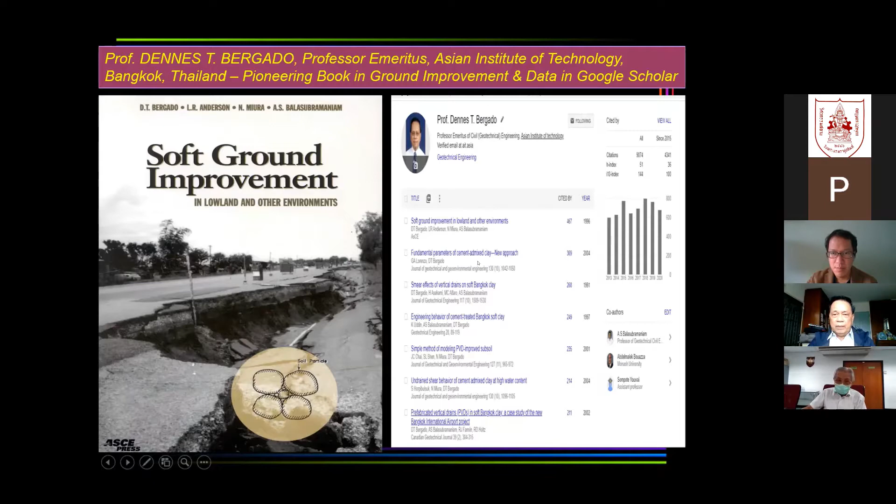So when we improve a soft clay or soft ground, the clay has mostly voids. The solid is only around 40%, but the voids are full of water because it is below the groundwater level. So the only way to reduce the voids is to take out water, and it's called dewatering.

So the previous work before was just preloading by embankment surcharge. And this takes a long time because of the length of the drainage paths for the pore water to go. So the installation of the PVD, or prefabricated vertical drain, reduces the drainage paths to only halfway of the spacing and makes the consolidation faster.

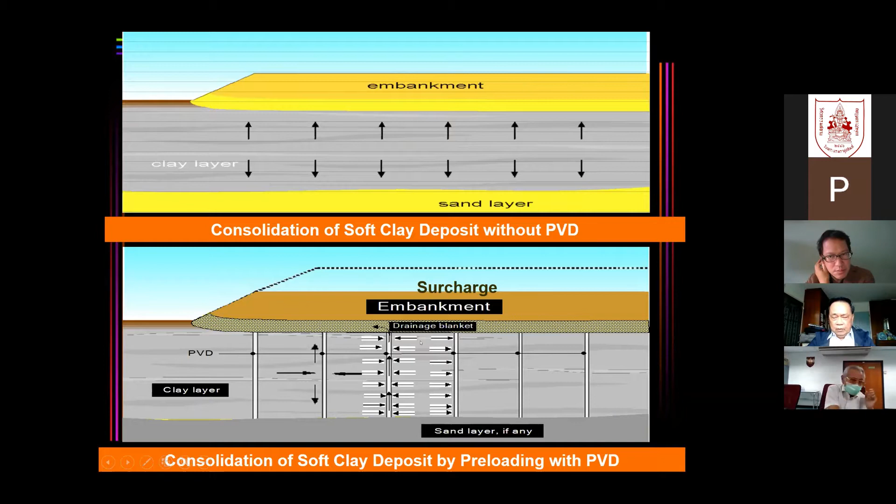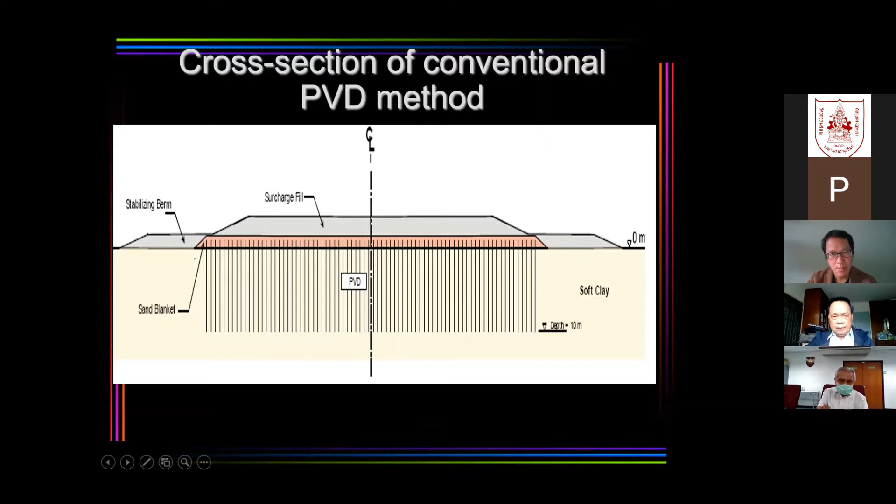So the conventional way was to install the PVDs and put the surcharge fill, but since the ground is soft, you need a berm to prevent sliding or slope failure. But if you provide that without drain, it takes quite a long time to complete consolidation. With vertical drain it is faster, but with vacuum, it is much faster, by about 30% or even 50%.

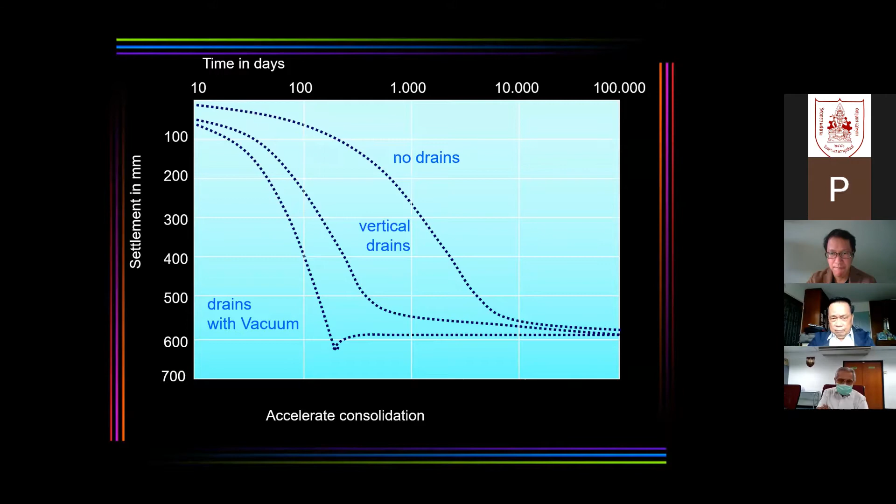So the PVD are artificial drainage paths made of geosynthetics, composed of a core which has channels of flow that conduct water up through the drain vertically, and a filter jacket around the core to minimize the entry of clay particles but allow water to pass through.

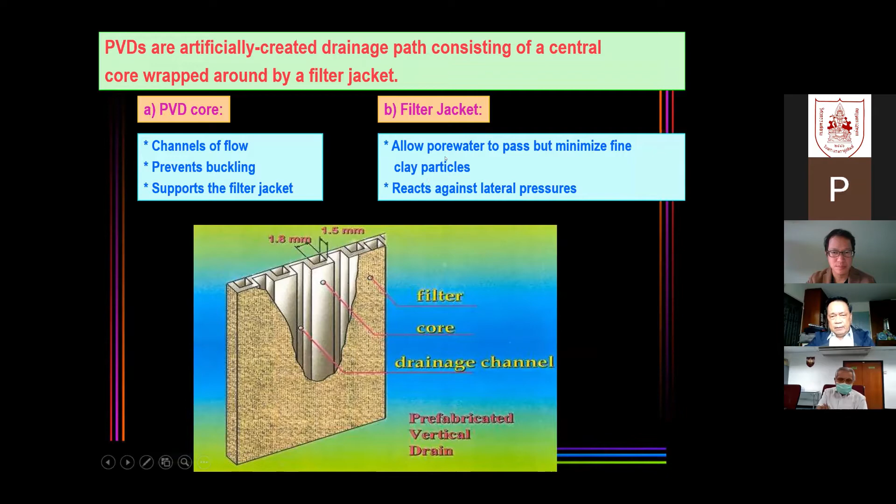So this is installed in a square and triangular pattern by a modified backhoe like this one. But during installation, it causes disturbance around the PVD, and this is called the zone of disturbance, or the smear zone. This is a barrier to flow because kH, the original permeability, is higher than the vertical permeability, but kS, the disturbed permeability in the disturbed zone, is quite low, reduced by the disturbance.

And most of the research was to look at how to mitigate this barrier of flow, the smear zone. By using vacuum pressure, it mitigates this. Although I also have research using electro-osmosis and heat, or thermo PVD, for using vacuum PVD we are mitigating the effect of the smear zone.

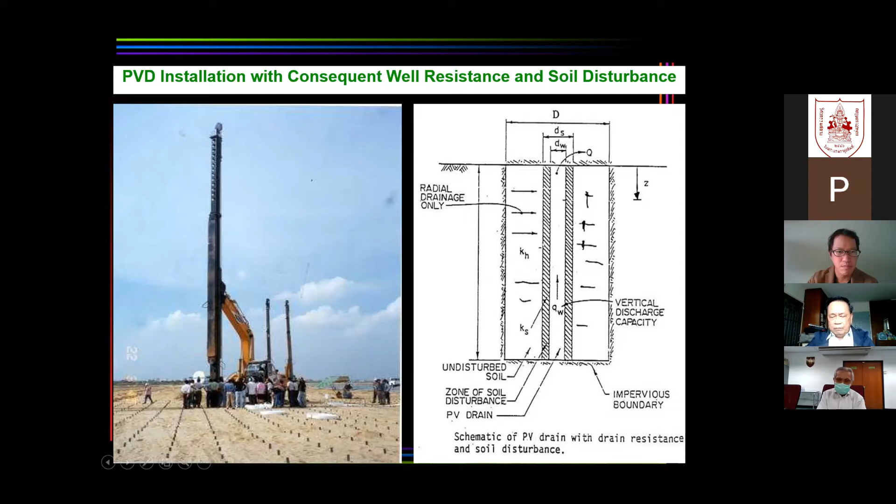So by using vacuum, instead of increasing the total surcharge or total pressure, because the surcharge causes some slope failure, we are looking at reducing the pore pressure by vacuum, and the effect is the same — you increase the effective stresses.

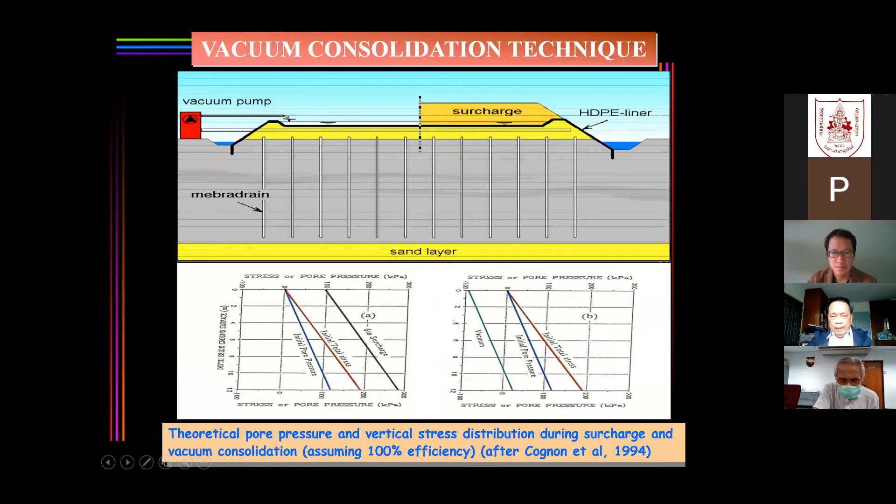So on the left side here is PVD consolidation. We only add the surcharge, and the hydraulic gradient causes the water to flow to the PVD. But with vacuum PVD, we apply additional atmospheric pressure, which is like an isotropic compression — the pressure is the same from all directions, horizontal, vertical, due to the atmospheric pressure up to 100 kPa, but we cannot go to 100 kPa, about 90 kPa we can add.

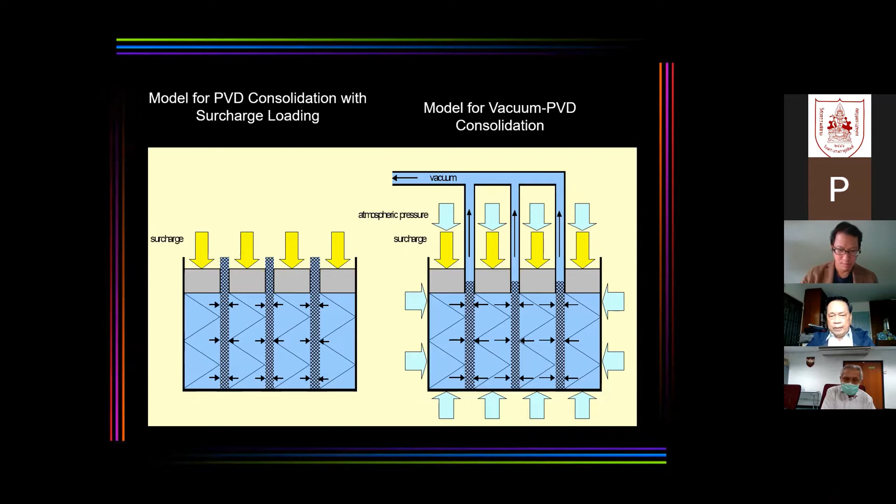So this is the schematic diagram. When we are applying the atmospheric pressure, it has an effect on the pore water.

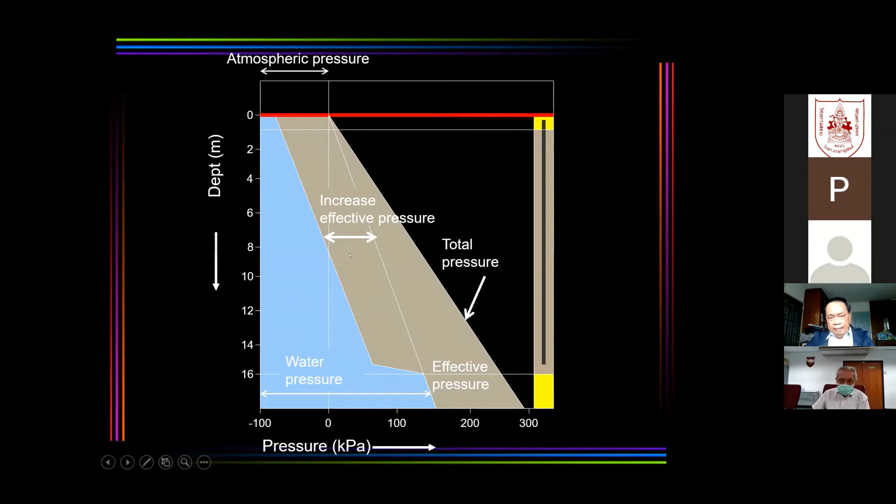So what are the benefits? Well, in cases where you need a lot of preloading, up to 90 kPa, we need to use surcharge and vacuum together, combining surcharge, embankment, and vacuum.

But after vacuum consolidation, there is some settlement, and the embankment will compensate for the settlements. Lateral deformation due to embankment is outward, while using vacuum it is inward. So there is some balance between inward and outward lateral displacement due to the embankment. That's why combining embankment and vacuum is ideal.

This is the list of my publications involving vacuum PVD since 2009.

I looked at it until last year, where we examine the microstructures within the smear zone. All this proves that by using vacuum PVD, the permeability in the smear zone increases, and Kh over Ks reduces, because Ks, the permeability in this smear zone, increases due to vacuum. We also look at the microstructures, the flocculated microstructure change from dispersed to flocculated, which increases the permeability in the smear zone.

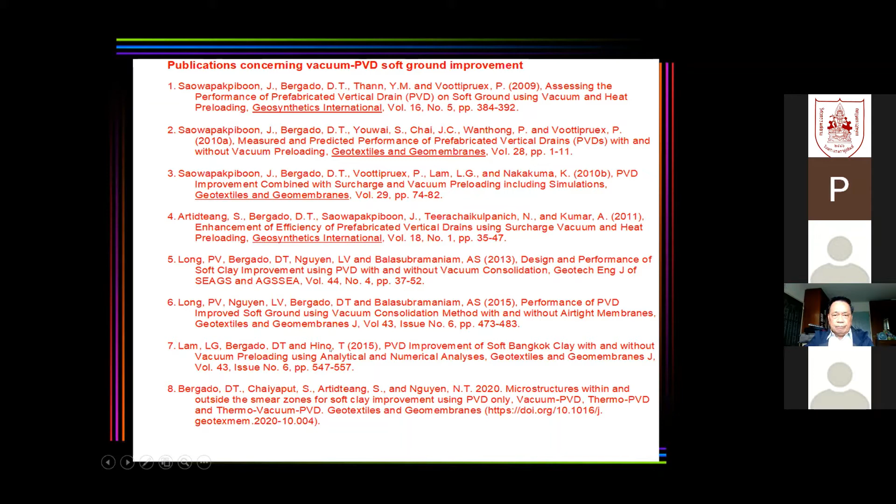So the ground deformation here by vacuum - I use the paper of Professor Chai in 2005, published at ASCE. He did this illustration that we have the soil with vertical and horizontal pressure. Horizontal pressure is K0 times the vertical stress.

When we apply vacuum, vertical and horizontal, depending on whether the vacuum is higher than the overburden pressure, you can have different movement or different lateral displacement.

K also is a ratio between the vacuum pressure and vertical and horizontal pressure, which is the sum of the vacuum pressure and the original K0 times sigma V0, the original from the unloaded soil caused by the overburden pressure.

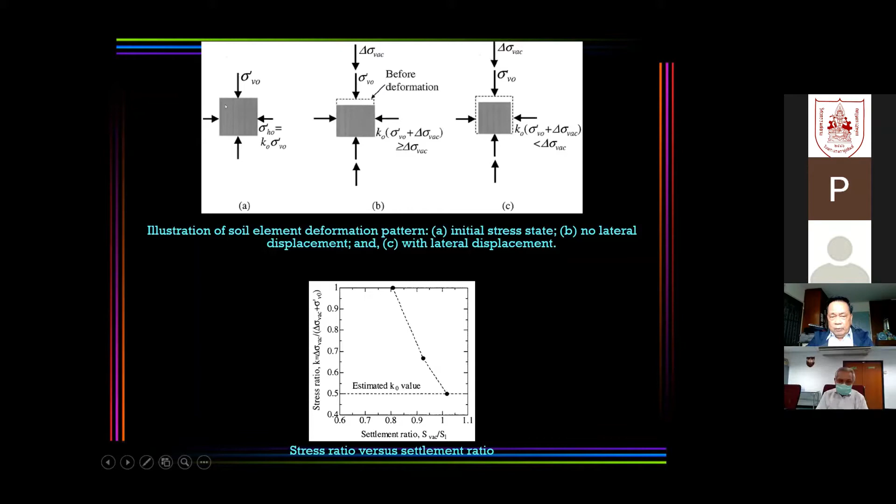So when the vacuum pressure is higher than the overburden pressure, we have inward movement that causes some tension cracks. This deformation can be predicted by the equations provided by Professor Chai, as you can see here. This can be used to check on the lateral movement.

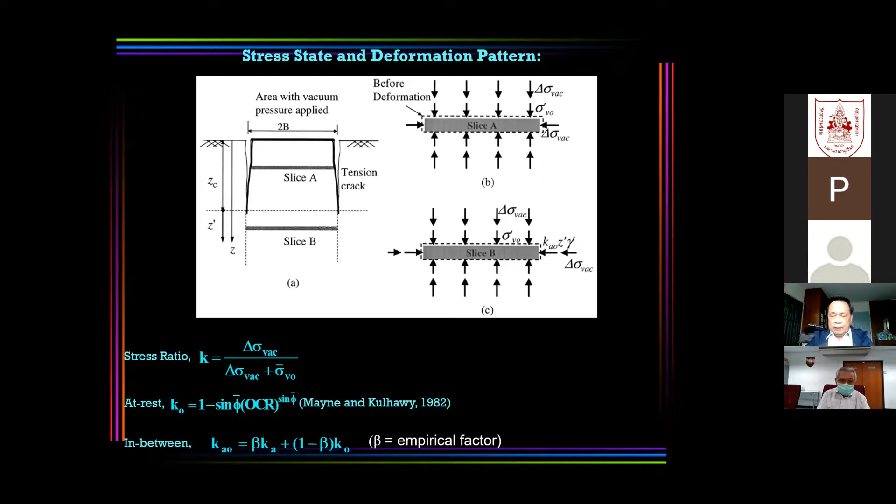And this is the lateral displacement here at the bottom, where B is half width of the area treated by vacuum consolidation.

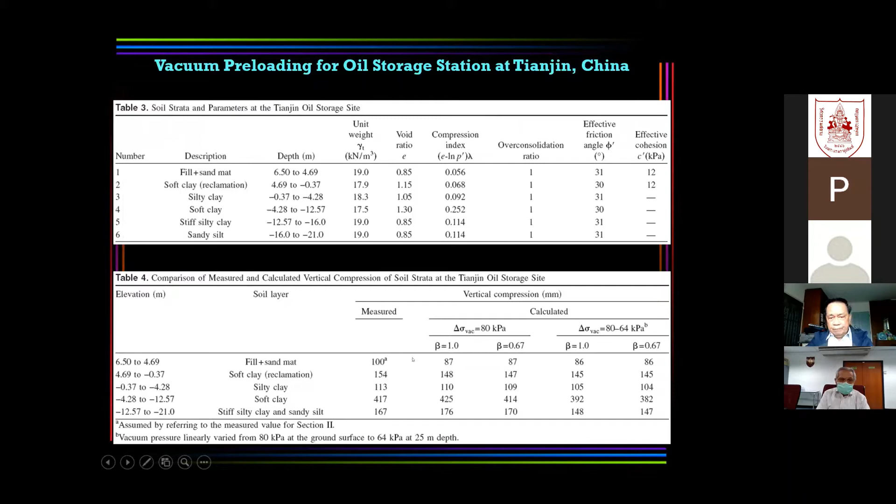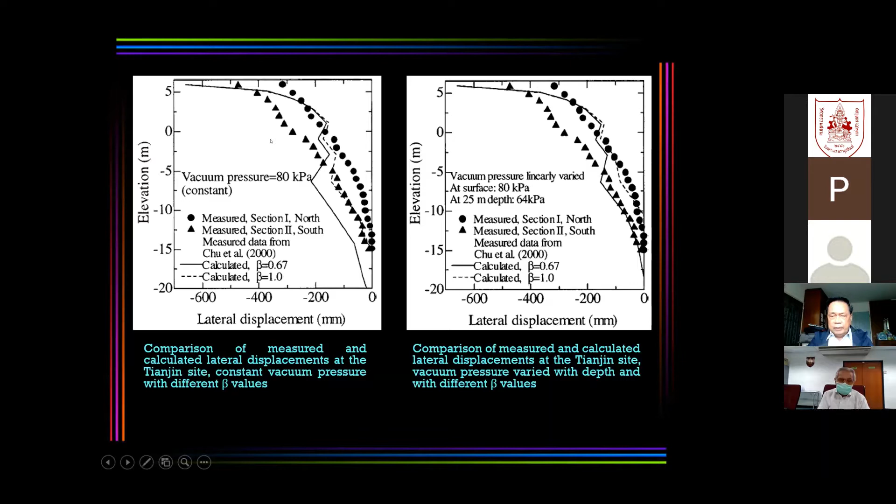Another site in China - here beta is an empirical factor, and here is the soil profile with calculated and measured, observed and calculated values. You can see also that it is predicting the inward movement.

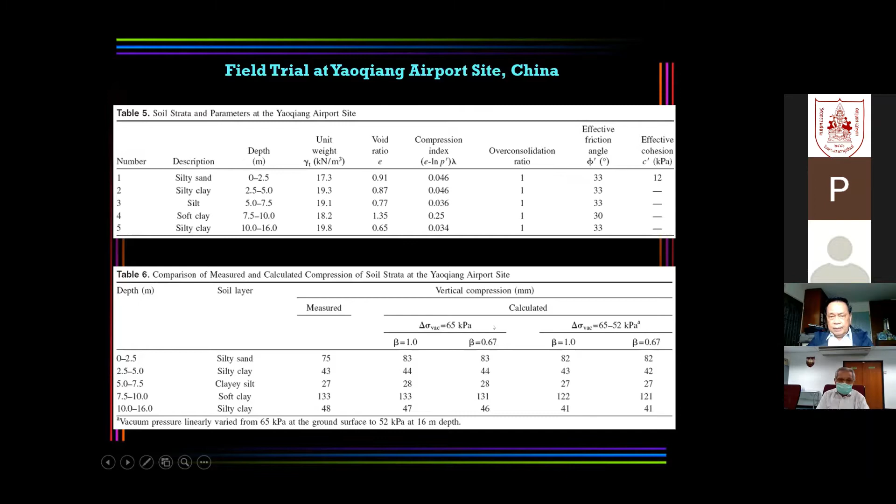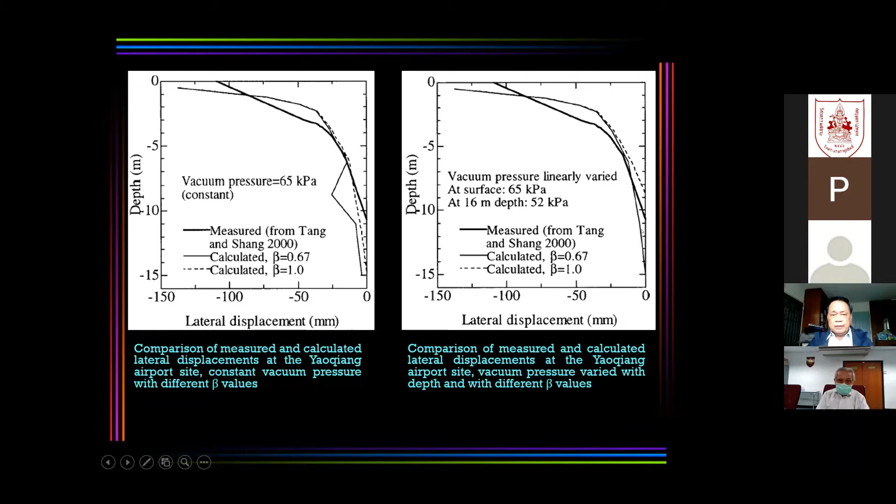So the idea is to combine vacuum with embankment preloading - another paper by Professor Chai, published in the Canadian Geotechnical Journal.

It shows the optimum penetration depth of the PVD when you don't have to go into the sand layer down below, because it will cause some complications. So you can stop it here, and you have some optimum length H1, which depends on the permeability kv1 and kv2.

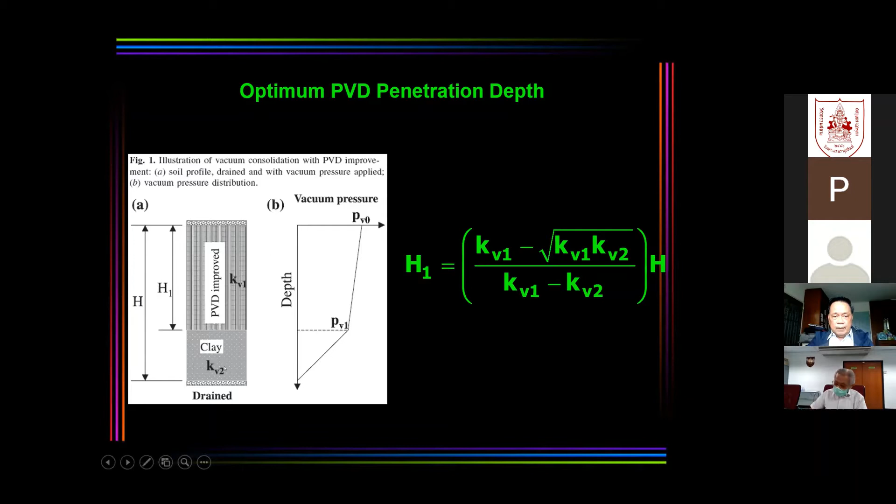He also derived, for two layers, the equivalent vertical permeability when you have PVD. This is one-dimensional flow vertically, with kv1 as the equivalent permeability as a function of the spacing, including the smear and well resistance, with the spacing.

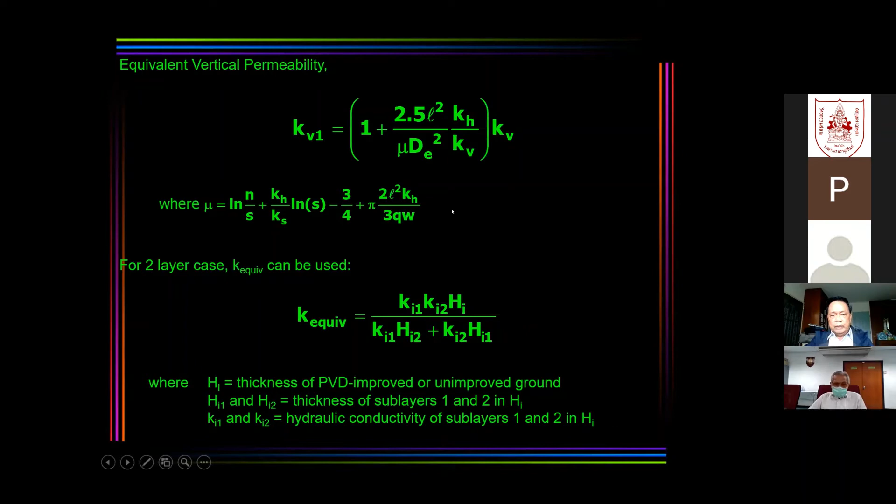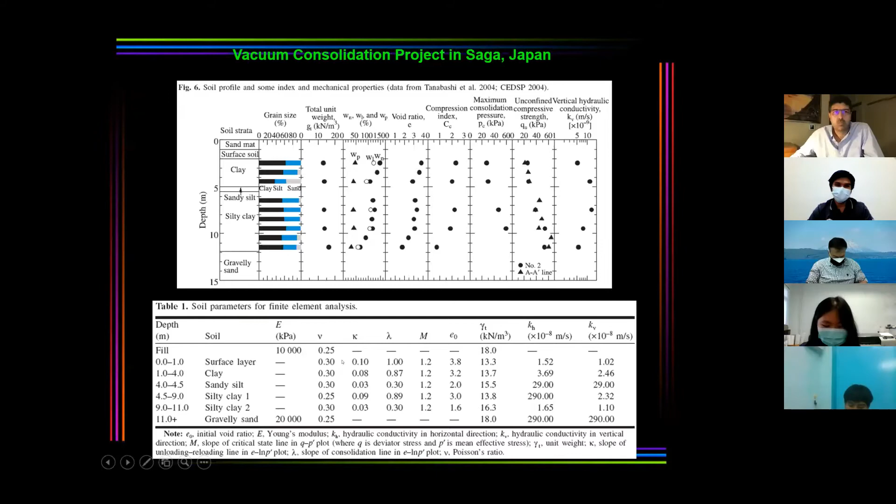So in Saga, there is the soil profile and parameters, used to simulate if the vacuum is intermittent - reduced and then brought back, because you reduce it and then bring it back. Then you have the settlements measured versus simulated, and the lateral movement, which is inward movement.

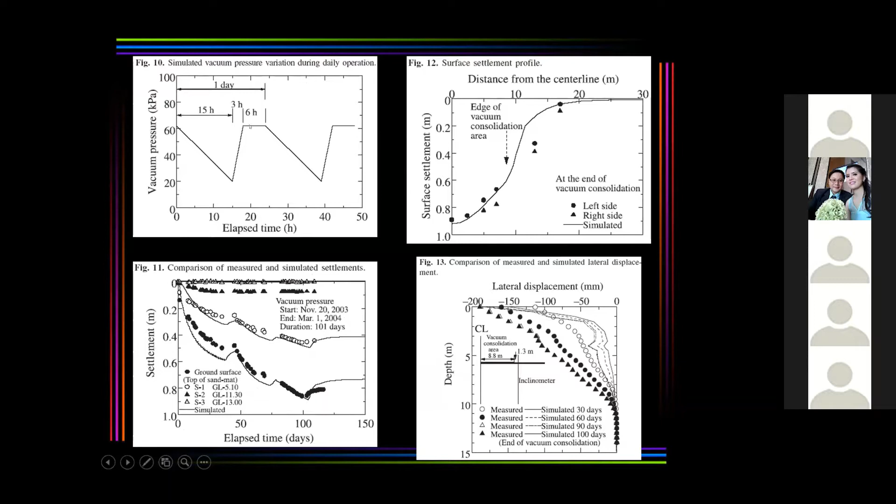Then we proceed to do a numerical experiment. Case 1: when you have the embankment already there, then you add intermittent vacuum. Case 2: you only have the embankment load, surcharge load. Case 3: you have the embankment load but low height, then you add vacuum, then increase the height of the embankment.

You see case 1 produces the maximum settlement because you have embankment plus vacuum. Case 2, embankment only, has settlement mostly the same as case 3, which has low embankment with vacuum and added height of the embankment.

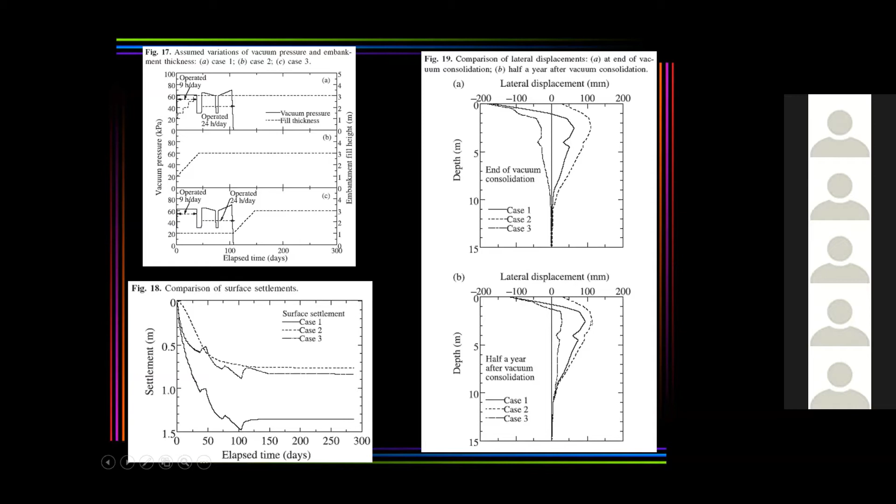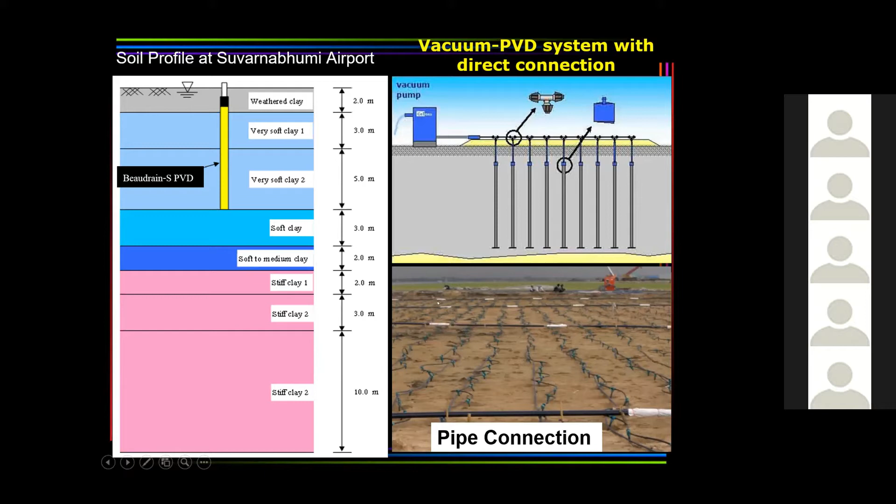When using conventional PVDs, as we did in our project at Suvarnabhumi, PVD only, we needed a surcharge embankment 4.2 meters high, and we used a berm to prevent slope failure. But when using vacuum, you only need about 2 to 2.7 meters high before applying vacuum, and there's no problem with slope failure.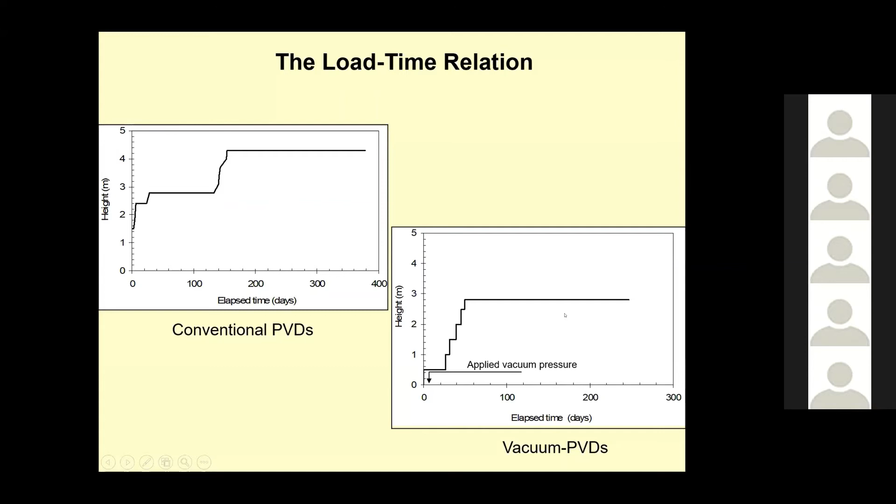The vacuum pressure at the embankment is around 90 kPa, and the vacuum pressure at the underlying clay layer is around 60 kPa. Comparing settlement for PVD only versus vacuum, you can see vacuum is around 30% faster than PVD only, or 1.5 times higher rate of consolidation.

At AIT, during my sabbatical in Japan, we did a large scale model test using reconstituted clay, comparing PVD only, called normal PVD, with vacuum PVD. You can see the vacuum case is faster. That was our first experiment at AIT.

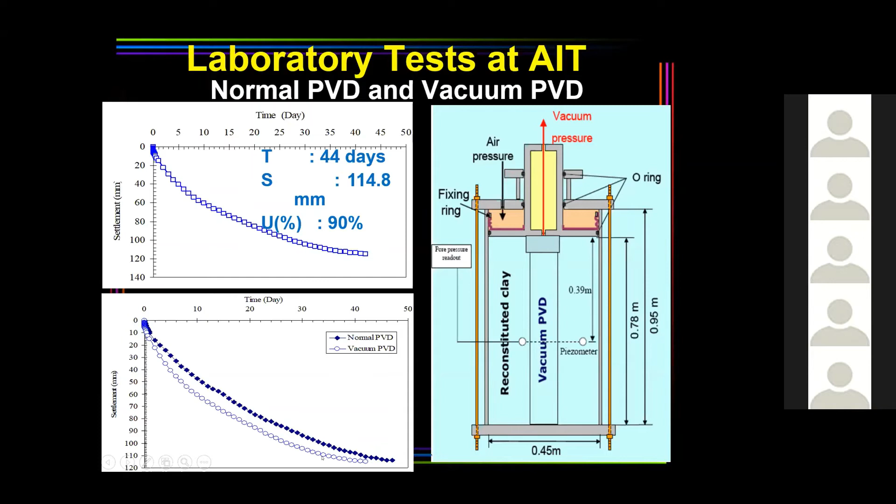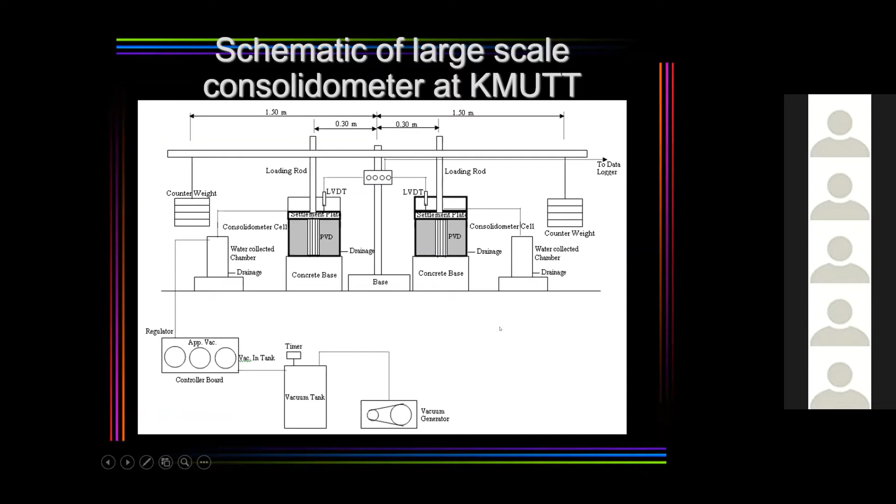This is the result when we published this study, comparing PVD with vacuum. The PVD only gives kh/ks of 1.5, vacuum gives 1.45, lower, but the Ch value is increased. So you have increased Ch and reduced kh/ks. By the way, kh/ks and Ch are a pair and should be considered together, since kh/ks controls the Ch value, or the coefficient of horizontal consolidation.

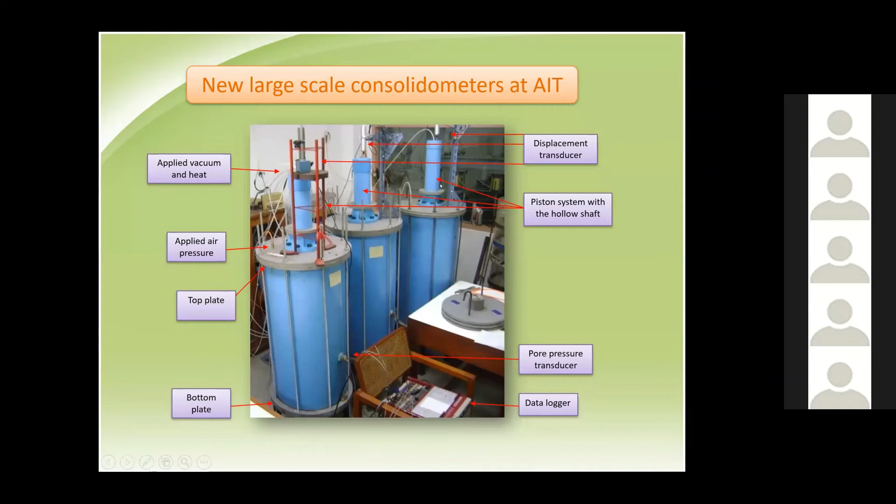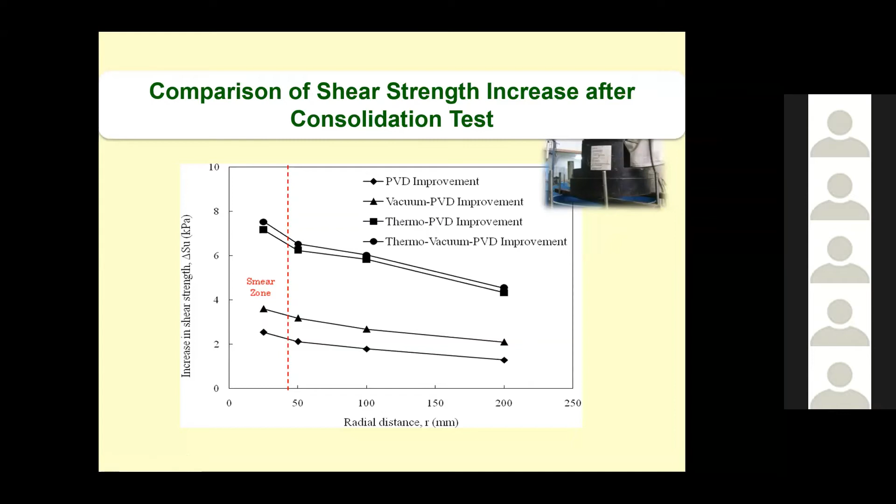We followed up with three simultaneous tests using PVD only, PVD with vacuum, and PVD with heat, or thermo PVD, measuring the increase of shear strength at the smear zone. PVD only has the lowest shear strength, then vacuum PVD higher, then thermo PVD highest, with thermo vacuum PVD also highest. For settlement, PVD only is followed by vacuum PVD, then thermo PVD below. So consistently, with vacuum PVD, the rate of settlement and time to consolidation is reduced.

We measured using a scanning electron microscope the micrographs: on the left side is the reconstituted clay, on the right side is after vacuum PVD. You can see that after vacuum, the structure becomes flocculated, while before vacuum it is dispersed. Flocculated means stronger, higher strength, and higher permeability. These samples were taken from the smear zone.

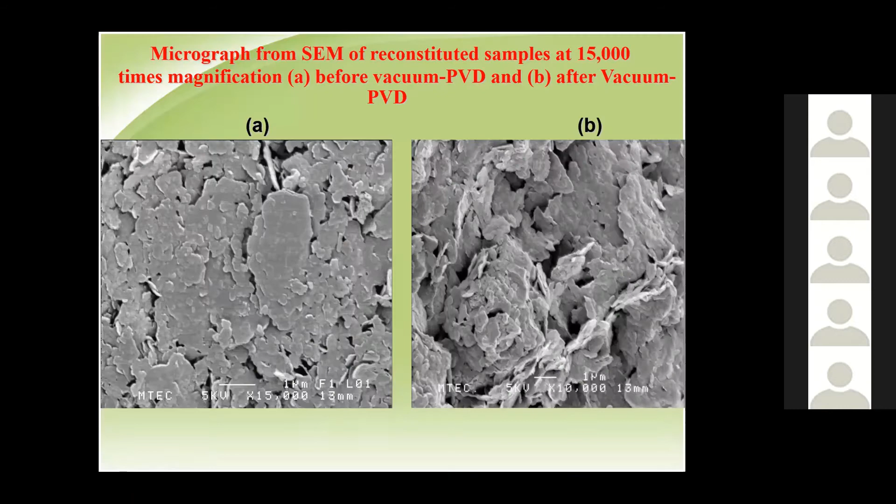From the direct connection, the vacuum system progressed to using an airtight membrane with direct connection still to the PVDs and the vacuum pump. This is much better to prevent vacuum leakage.

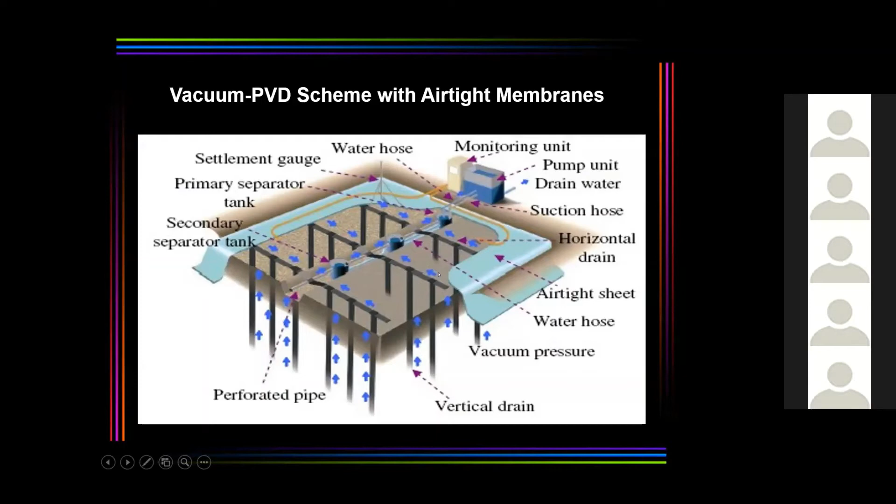Now our present project at the Suvarnabhumi Airport by C2, you can see the air-water separation system distributed in the field, with the connection of the vertical drain to the horizontal drain and perforated pipes connecting to the vacuum pump. You can see the distributed air-water separator, all connected to the vacuum.

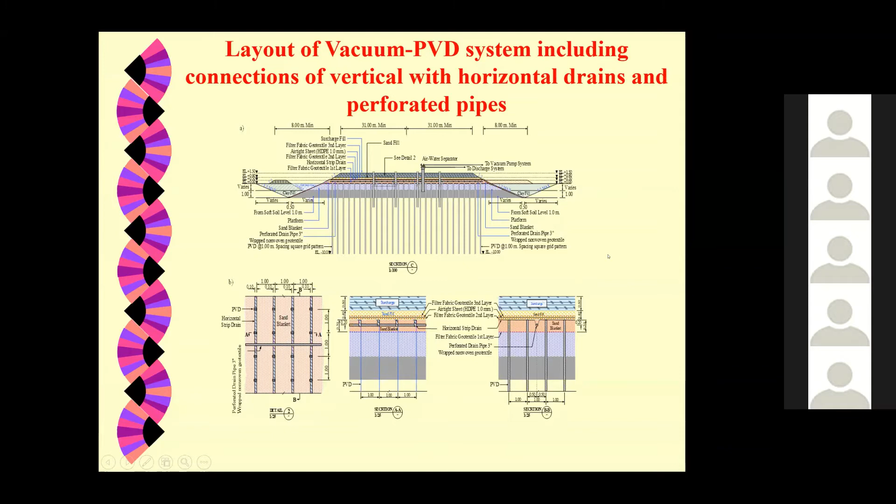We use a lot of geosynthetics here: separator, airtight sheets which is HDPE or geomembrane, and geotextiles, horizontal PVD with vertical connection to the perforated pipes. This is the air-water separation with vacuum meter and water discharge during operation of vacuum PVD preloading.

The last portion of my lecture discusses the latest project we had, located near the Suvarnabhumi Airport. This shows the borehole locations and field vane test locations after the improvement.

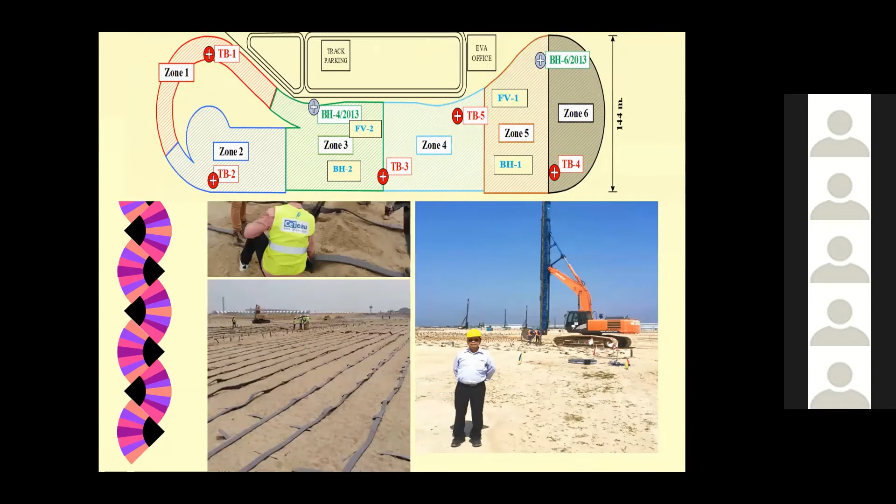You see the installation of the PVD connected with the horizontal drain, connected with the perforated pipes, done by C2. This is the soil profile in that area, where the depth of the PVD goes to around 17 meters. There were some 2 to 3 meters of surcharge already existing.

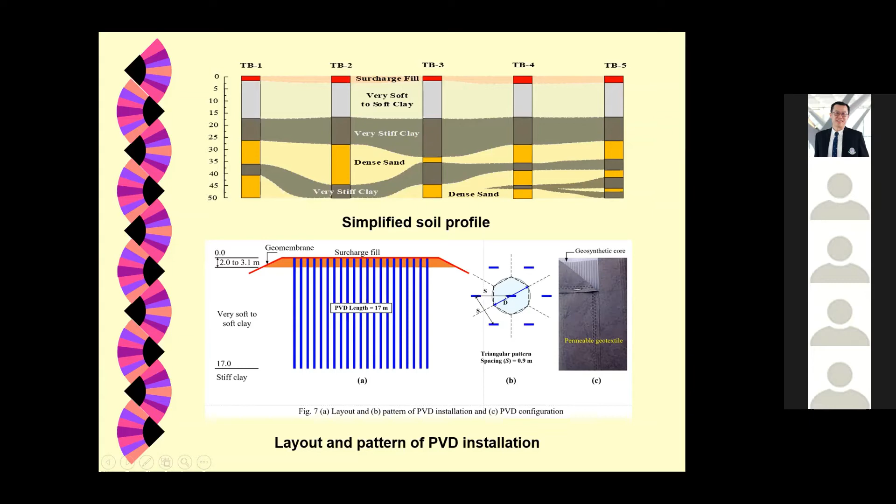We applied vacuum with triangular spacing at 0.9 meter spacing. This was designed by Francisco, and you can see 4 piezometers here, single and double piezometers, along with settlement plates and inclinometers for our monitoring instruments.

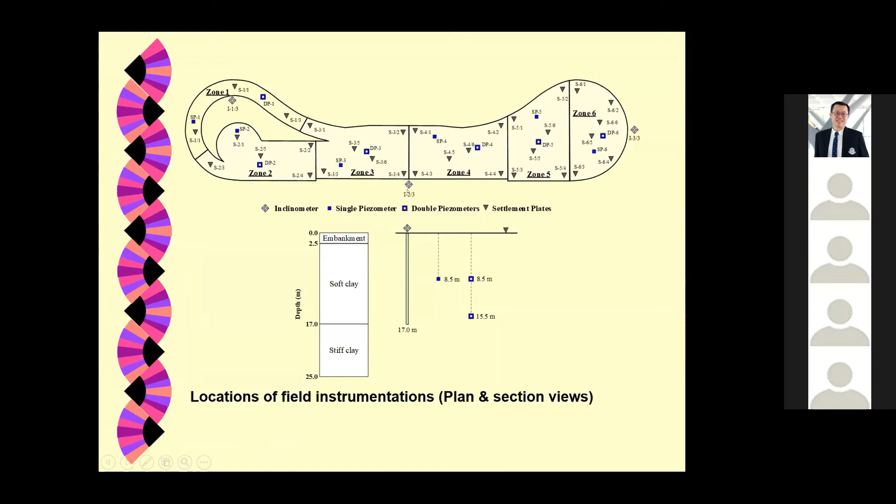You can see the vacuum pressure goes around 80 kPa, with pressure in the middle of the clay around 60, measured by single and double piezometers. So 80 at the top and 60 at the underlying layer, but it reduces with depth according to those measurements. As Professor Chai noted, it reduces from around 60 to around 50 with depth.

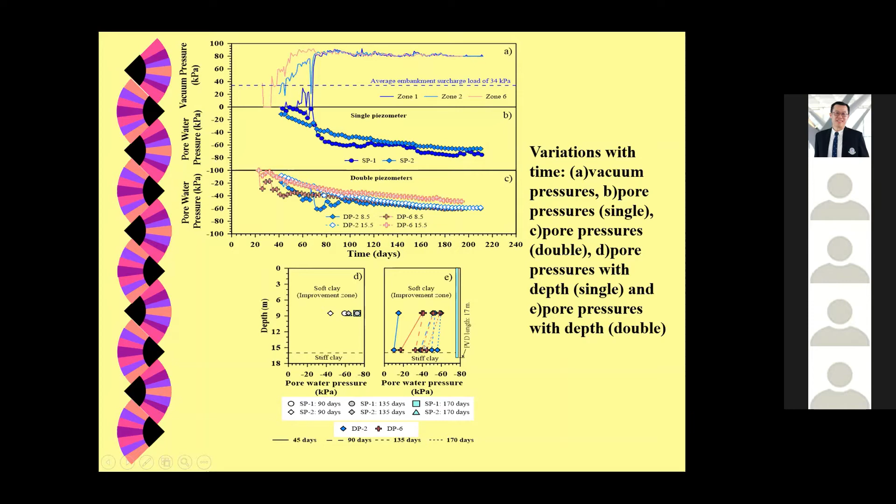Then we have the settlements, divided into zones 1 to 6, and the rate of settlements in millimeters per day. At 90% degree of consolidation, or rate of settlement of 5 millimeters per day, this is the criteria to stop the vacuum.

Settlements range from around 1.6 to around 1.8 for a thickness of 17 meters, so the vertical compression is around 10% of the thickness of the clay. This is the general estimate of the compression of the clay. Using the Asaoka method, we can predict ultimate settlements: zone 1 around 1.6, zone 3 around 1.8 to 1.7, and zone 6

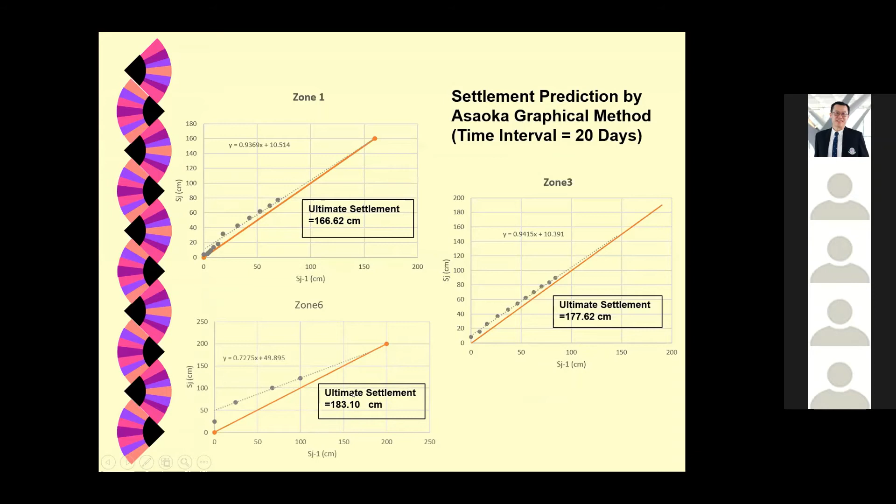around 1.8 meters settlement. Then when we back-calculate kh/ks, ds/dw, and Ch for zone 2 and zone 6, for example, at the Suvarnabhumi airport with PVD only, we used kh/ks around 5. But with vacuum, it may reduce to around 4 because it reduces a little bit, and the Cs value is around 3 — that was used in the design.

This is a diagram of before and after soil properties. The water content reduces, liquid limit reduces, shear strength increases, compression index and recompression index reduce, void ratio reduces because we are compressing — so water content and void ratio reduce. But over-consolidation increases and the maximum past pressure increases from around 40 to about 80. The undrained strength increased by almost twice, from about 10 kPa to around 20 kPa, improving the very soft to soft clay so it becomes soft clay or even medium clay.

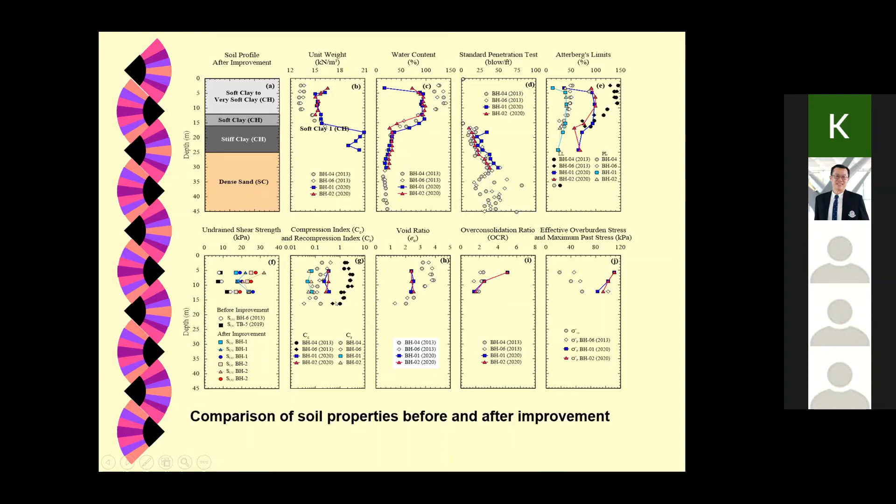You can see here the field vane shear test, and before and after you see the increase almost twice, more than twice for very soft to soft, especially at the very soft to soft clay layer.

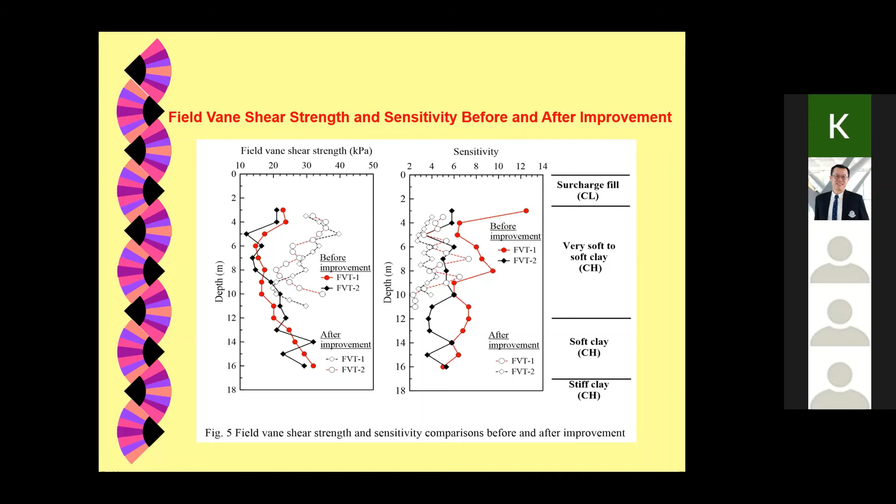Of course there is cracking because of inward movement. You can see the inward movement here, cracking around 6 meters from the edge of the loading area. The cracking did not disturb or affect the airtight membranes, so it did not cause any leakage. Cracking occurred around 6 meters from the edge of the loading area, and from the finite element simulation you can see 6 meters from the edge, with the depth of the cracks

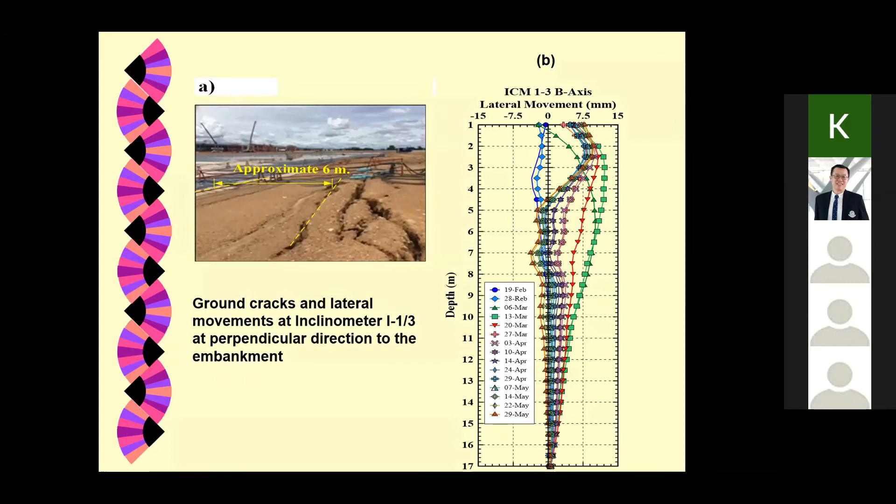around 4.2 meters. This can be measured using the method of Chai 2005. So we have this simulation from finite elements for the distance of the crack and the depth of the crack.

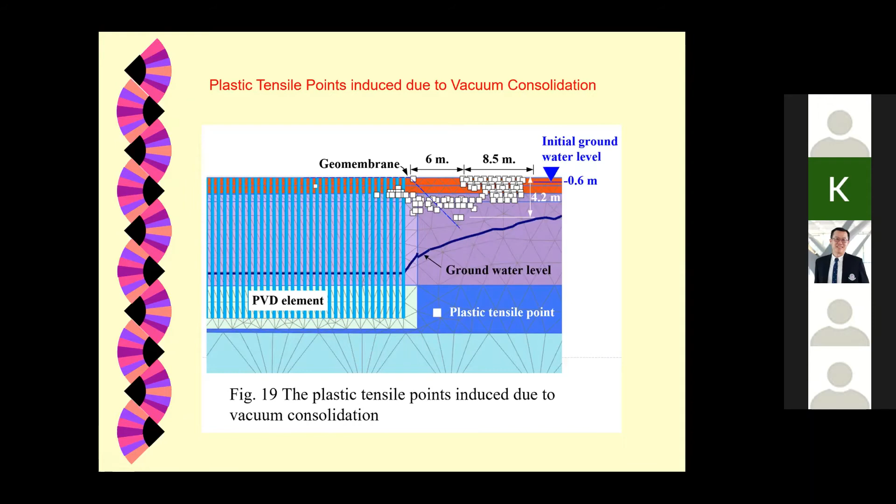Then we look at secondary compression. The coefficient C-alpha, for a recompression ratio of 0.05, we have C-alpha of 0.002. Then at 10 years from the end of primary consolidation, we have Ts/Tp around 10, and the log of that is 1.

If the thickness is 15 meters — by the way, on this side the thickness of the clay is only 15 meters because there was a 2-meter embankment on top of it, that's why it becomes 17 — if we have 15-meter thickness, we multiply that by C-alpha of 0.002, then we have 30 millimeters per 10 years. So the amount of secondary consolidation is 3 millimeters per year because this ground is already over-consolidated, as the maximum past pressure increased from 40 to 80 kPa.

So now we are dealing with over-consolidated soils with low secondary compression.

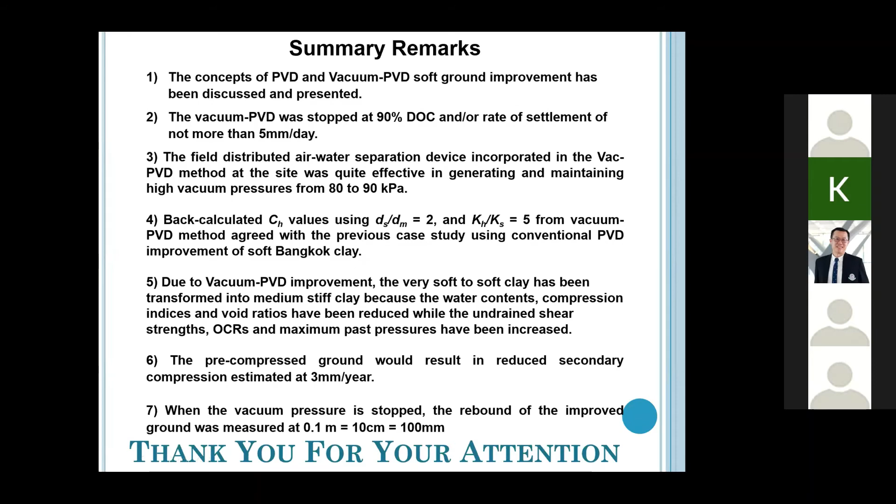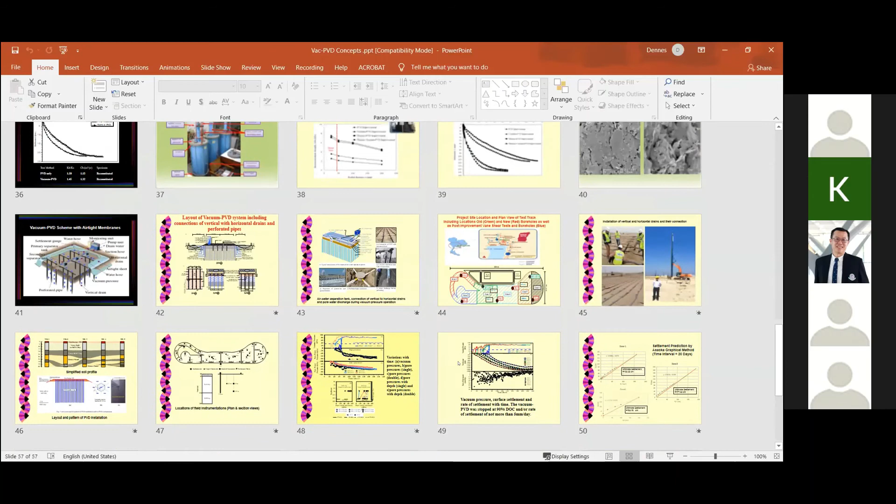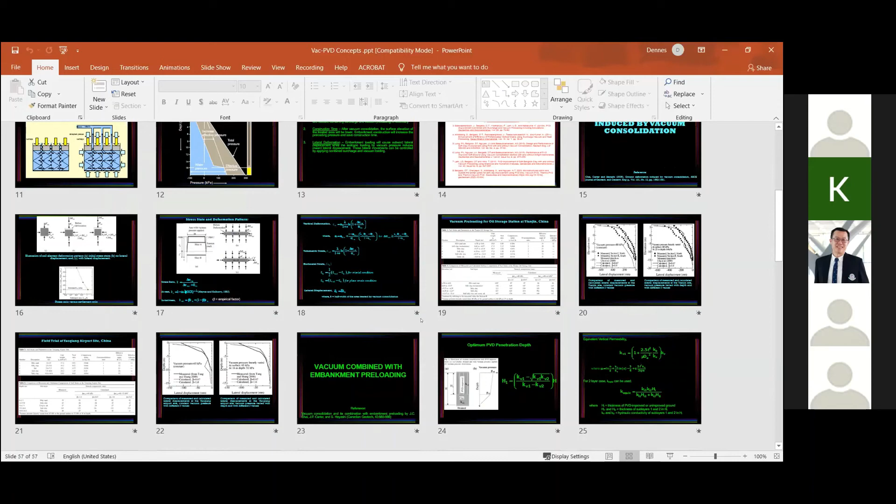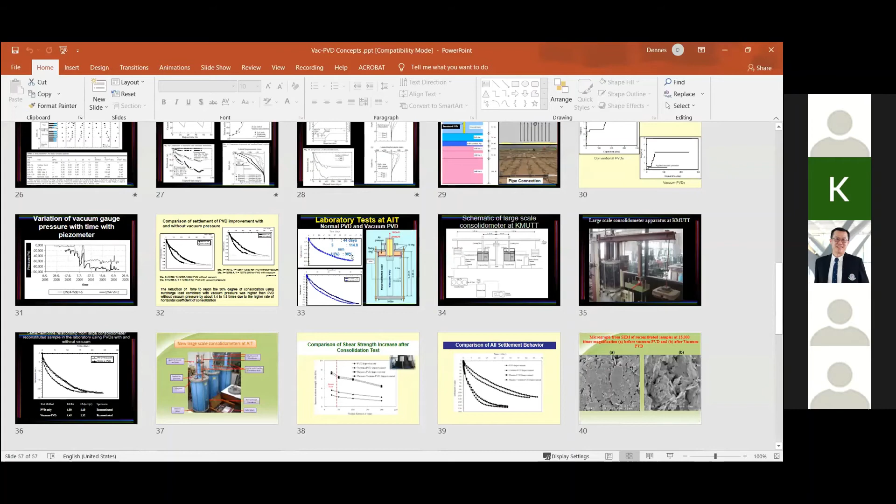The question is about the duty or function of geotextile and geomembrane in the vacuum PVD section - specifically the function of geotextile and geomembrane in the VCM. The second question is about the consolidation time of vacuum PVD compared to PVD alone. I think vacuum PVD should be less than PVD by 1.5 times. And how about PVD with preloading? Normally we don't have PVD alone, we just have PVD with preloading. So maybe the second question is the difference between PVD with surcharging or preloading compared with VCM, and what is the time difference?

What is the time difference? Can you see this slide here? Yes, yes.

The function of geosynthetics resides in the PVD which is composed of geosynthetics. First, we have the geotextile for separation below and above the sand blanket. The sand blanket has to be separated from the original ground by geotextile, and then above the sand blanket you have another geotextile. Then you have the geomembrane, HDPE, for the airtight sheets - this is an impermeable membrane. Above it, we have to put geotextile again to protect the geomembrane from puncture. So we have 3 layers: below sand blanket, above sand blanket, then geomembrane, then above geomembrane another geotextile. That is the function of the geosynthetics here, plus the horizontal strip drain and the vertical PVD.

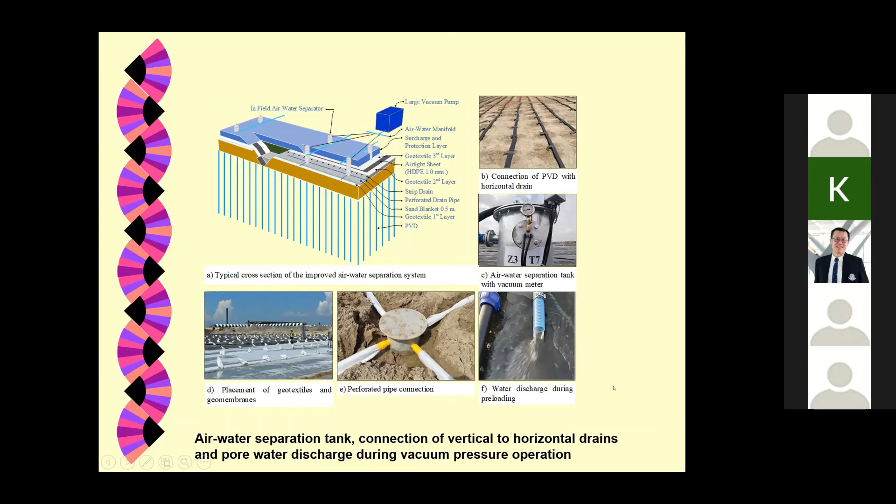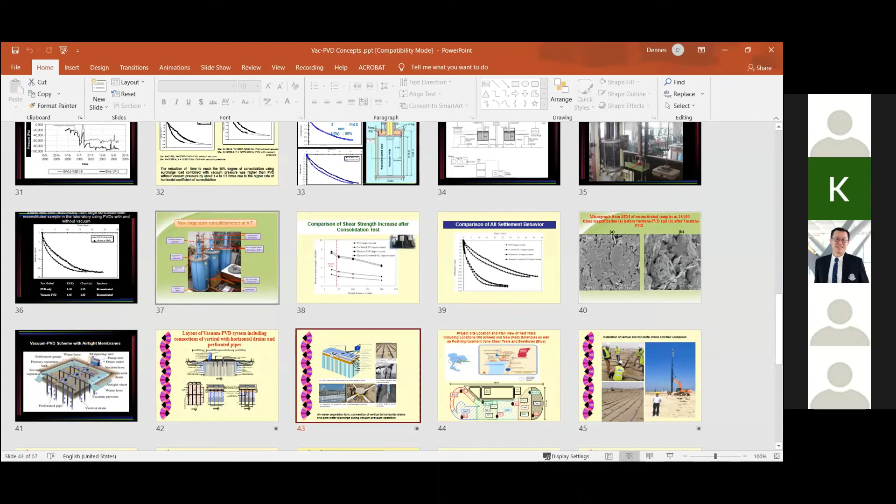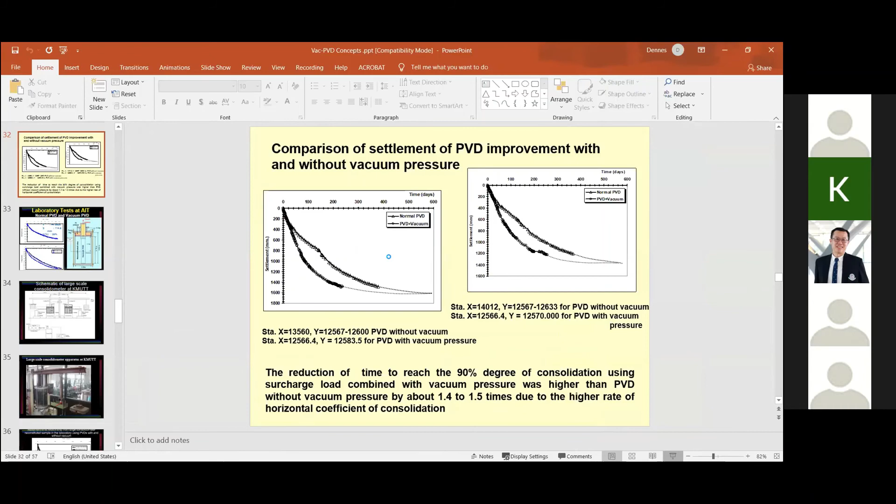The second question is about timing. PVD - maybe this is a good example here. With PVD only, because of stage loading, you have one stage, second stage, it takes about 1 year in Suvarnabhumi, 365 days to complete the work. But with vacuum PVD, you can finish at 90% consolidation around 200, a little bit more than 200 days. But now with new airtight membranes, we can finish the vacuum PVD in 5 to 6 months. So compared with 1 year for PVD only, with 5 to 6 months you reduce by about 50%.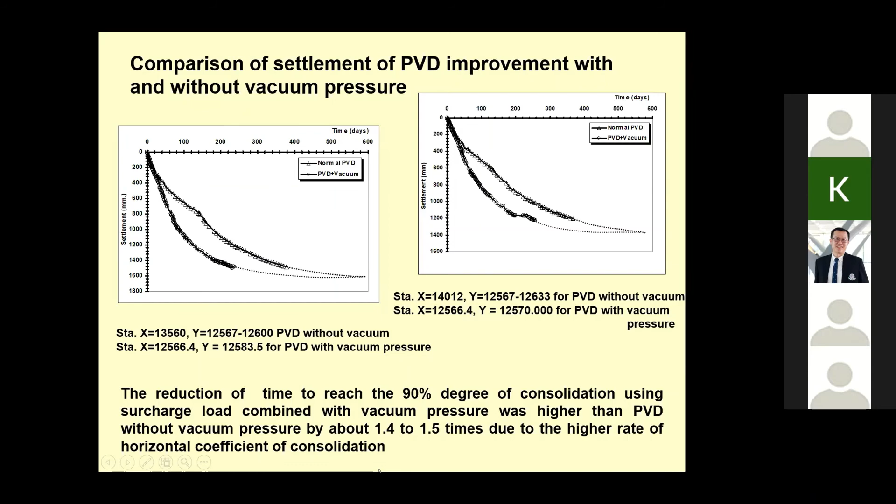The consolidation time, as you can see in our project - you can see this one, 90%, 200 days is about 6 months here. 6 times 30 is 180, 200 days.

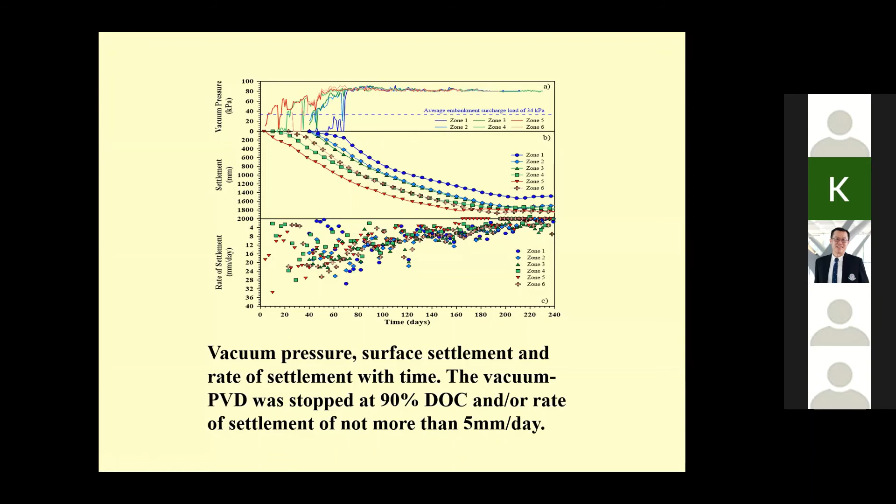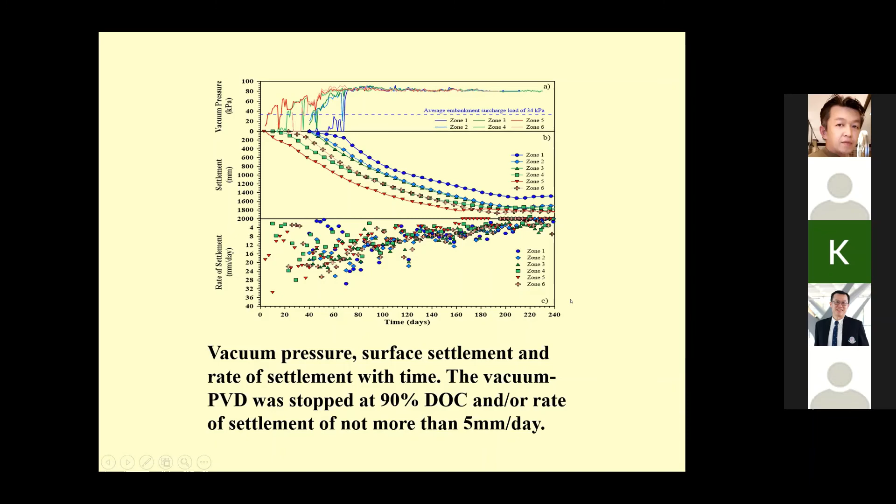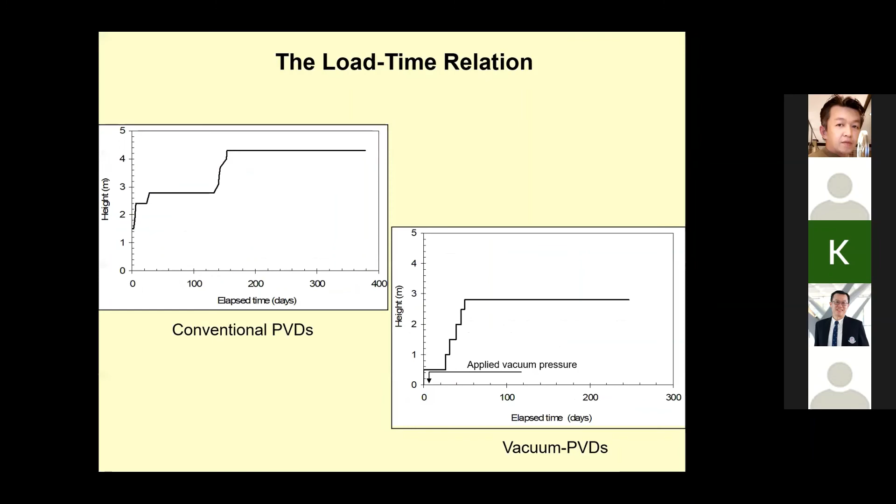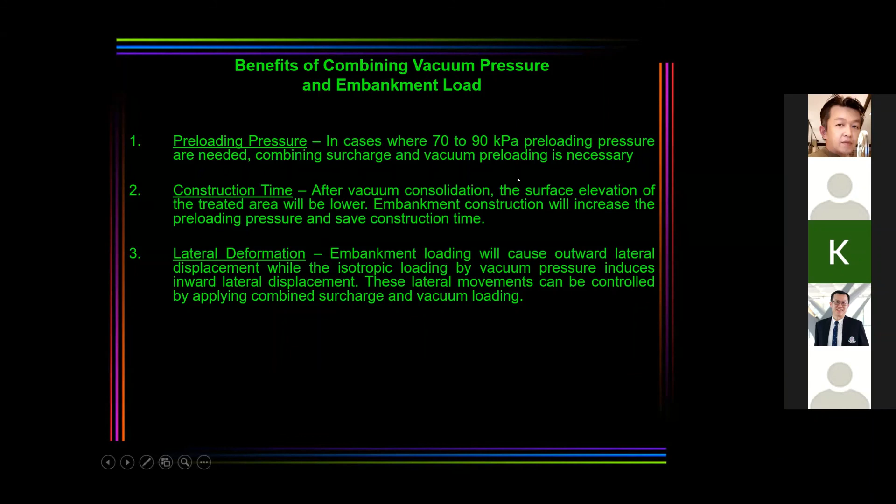The next question is whether VCM is a good method for land reclamation. Yes, I think as of now the cost of VCM, if you compare with PVD only, is almost the same or even cheaper. Looking at the advantages given in my earlier slides - the benefits of vacuum PVD are that you can use large preloading, minimize outward movement, and you save time. You minimize lateral outward movement and you save time.

For reclamation, the only problem with vacuum PVD is when there are sand lenses within the soft clay that will affect the vacuum. The effect of vacuum is reduced when you have sand lenses in your soft clay layer. But if the reclamation is made of clay fill, or before reclamation there is mud below the sea, you can improve that. But if the fill in reclamation is sand, then you cannot use PVD. If it's a hydraulic fill dredged from the sea made of corals and sand, you cannot use PVD - you use only deep compaction or vibro flotation. You can only use PVD on the underlying mud below, deposited originally below the sea bed.

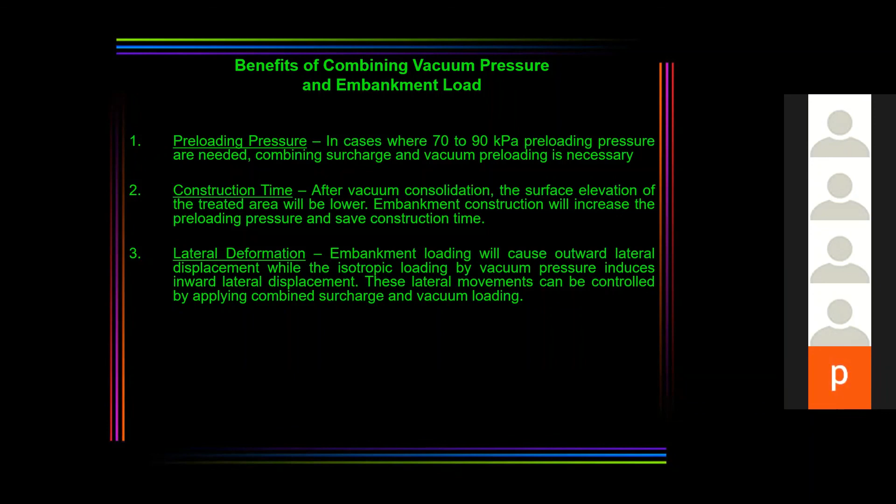Is that okay? I cannot hear you. Oh, I'm sorry. Can you hear me? Yeah.

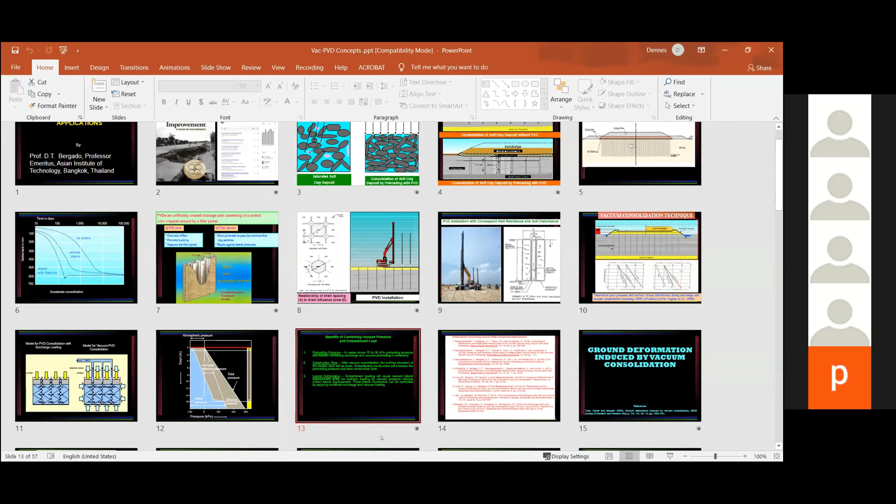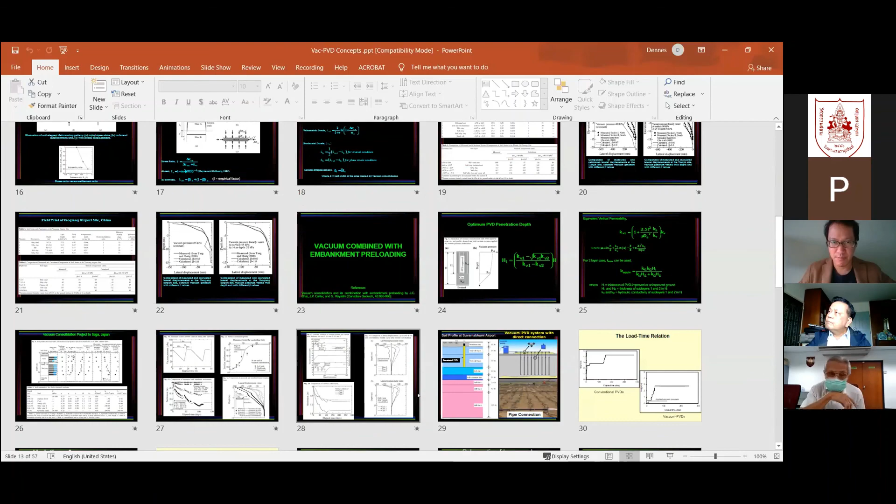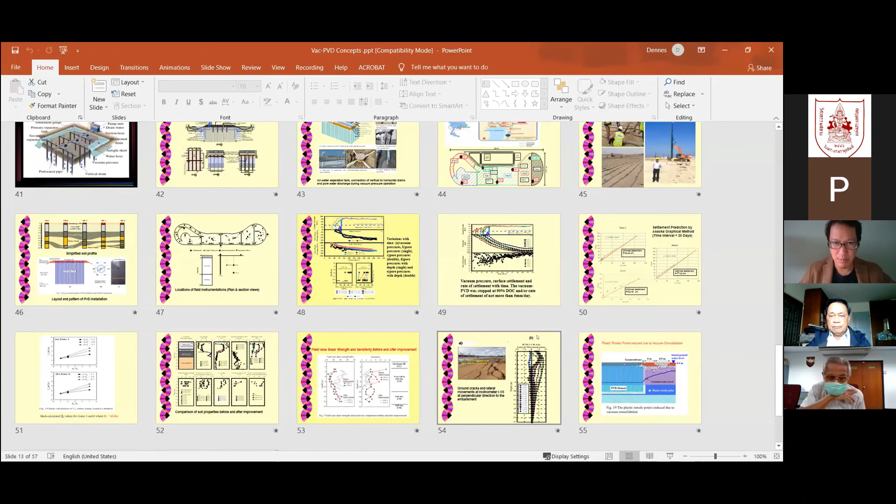The next question is, can we use the Asaoka method if the vacuum pressure isn't constant? No, the Asaoka method is working on the settlement - you are looking at the settlement. So if the loading is not constant, then you have to separate your Asaoka method at the different segments of the settlement.

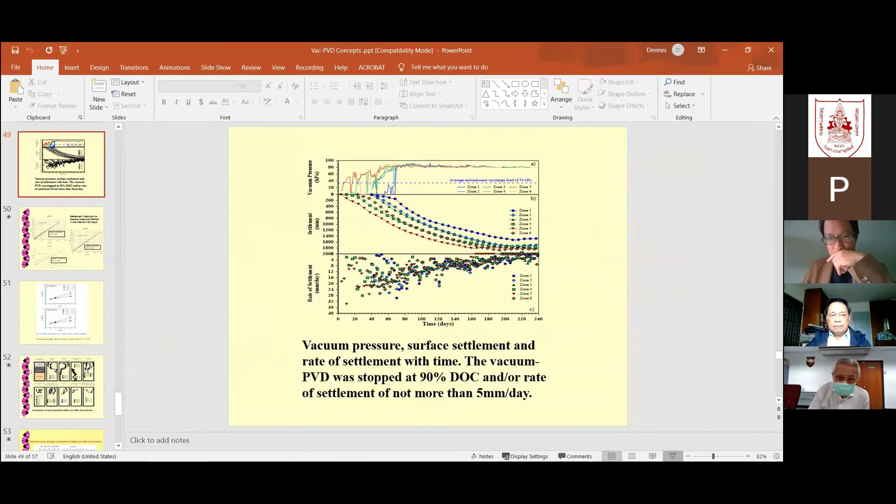For example, if this is the settlement here - if your vacuum pressure is not constant, your settlement also varies. So you can separate the settlement into segments because they are not continuous. That gives you a lot of headache. The concept of Asaoka is that the prediction has to be based on the constant load applied. For this load, this is the settlement, then you can analyze it, corresponding to each load.